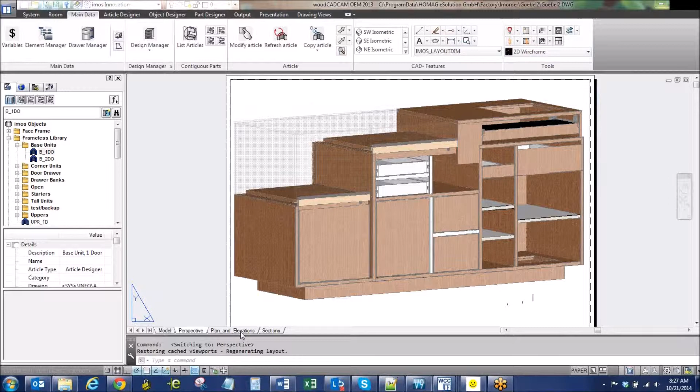And I just set that up, as well as plans and elevations, sections, just very simply drawn from the overall 3D article. So how this was set up, I can look at in the article designer by going to modify article. And it's kind of easier to see if I minimize this stuff here.

Just walk through it from the top. So here's your overall article, and within this first area you have divisions, and the divisions are horizontal in this case, and they're defined vertically in space by this linear division here.

So this first number is the height of the toe kick. If we wanted to make it a bit taller, we could do that, and everything adjusts parametrically as far as the zones with that.

Same with the top here. Just make that a bit taller there, and that's with this one in the middle fills the space that's not defined by these numbers here and the height that I have chosen here.

So just kind of go back to the head. We'll dive into this a little bit deeper.

So once that's divided, I have another zone here on top, and within that zone I have a couple more dividers, one over on the right side for kind of a setback for this top piece, which was 3/8 of an inch, and here I've set it back 3/4 of an inch, and this lower piece will be set back 3/8 of an inch, so there ends up with a 3/8 kind of reveal on the top here.

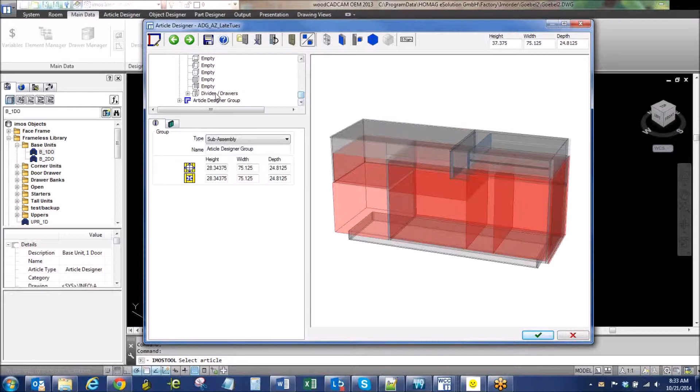So you will come into the middle zone vertically and look at our first division here, which is a virtual division, defined by this. And like I said, this zone over here on the right side is just 3/8 of an inch to kind of get that reveal working like it needs to be.

So I could change this parametrically on the left side, for example. Just bring that over, and now we got a real narrow shelf here, and all the glass and everything is still lining up like you'd expect it to.

Move that back over and look a little bit further. So basically what you're saying is you can take an existing—these guys never do the same thing twice—but you're taking the existing fixture that you built, and by changing a couple of parameters in there, actually readjusted the fixture to a new fixture.

Yeah, that's correct, Roger. And also what I didn't mention is where you have these kind of hard numbers, this could be a variable also, so that when you change this variable, which I have over here, this dollar sign, I'd have to get into the variable table to show you closer about that, but you could have a variable here so that if this was subject to change on a job-by-job basis, you could define that in your variable list and then not even have to come in here and mess with the numbers, which is nice in some cases as well.

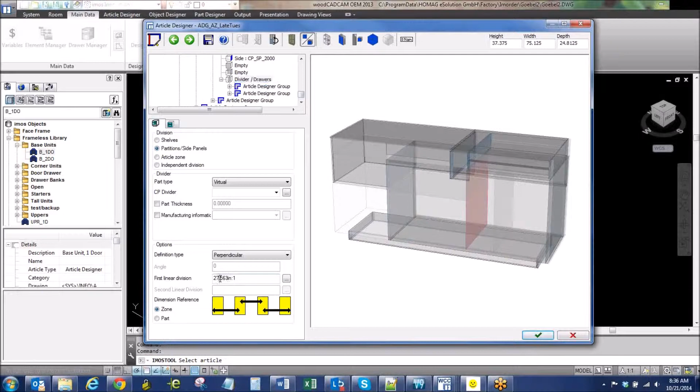And again, parametric here. So within this side, I have a virtual divider, and then this is an article zone. So in the article zone, I have actually an article designed, which is called the AZG_R.

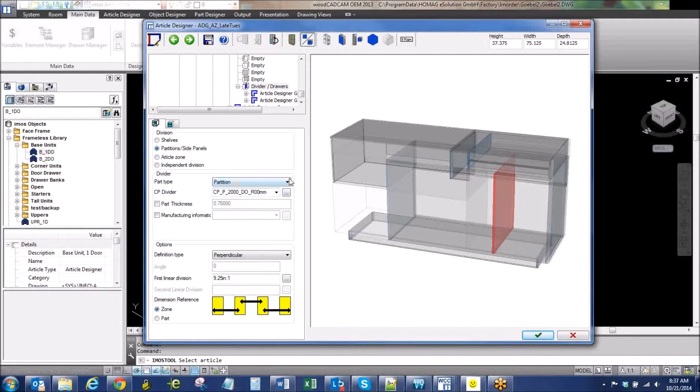Can you please explain the difference between a virtual divider and a real divider? Sure. A virtual divider would just kind of define spaces within an article, and it's a zone separator, so that you could have a divider be a partition, for example, and it is a partition, and I could come and make it an actual partition, and there's an actual partition with the construction principle and machining associated with it. But in this case, it just made more sense to do it as a virtual divider and then have that side actually in the article zone.

Right. So I can come up with any cube, or even with radiuses in the front. In other words, you just started out by saying this is the height, width, and depth of this article, but you could start with radiused articles and stuff like that and build it up from there using the virtual space dividers and so on. Also, correct? Yeah, absolutely. I'm just trying to give them a broader picture beyond this particular fixture.

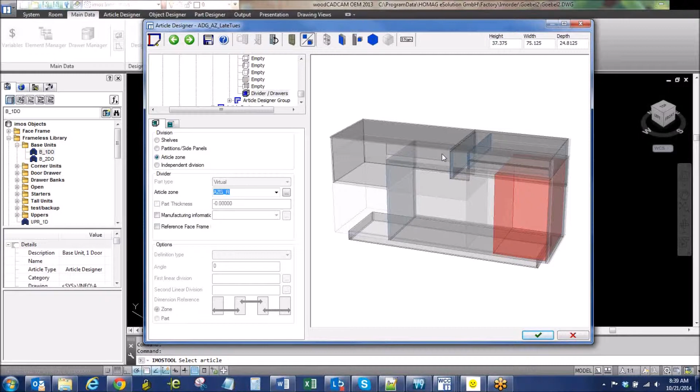Does this article have doors? No, there's no doors on this. Okay, I believe there's just drawers. Okay.

This is a tough question, giving them a real idea of how long it would actually take. But assuming these guys were pros at figuring out how to divide the space up using these virtual dividers and laying that out, they're going to end up doing it every single day, or they'll build parametric units which probably require very little modification. But just from scratch, assuming you had the proper parts, drawers, doors, sliding shelves, hardware and all that, how long do you think an experienced user would take to achieve this fixture?

This is fairly complicated, lots of ins and outs, but less than a day, I would say, is reasonable.

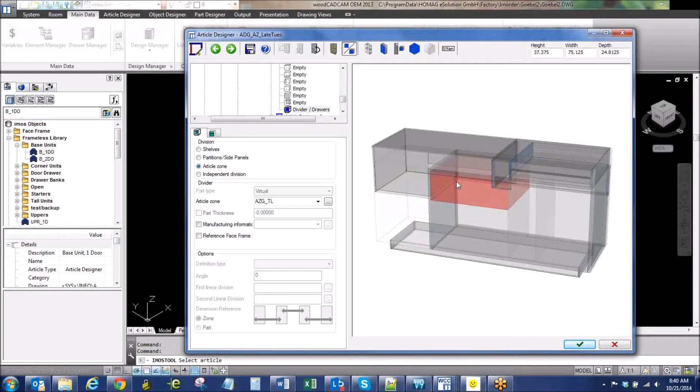One of the more complicated areas, maybe I'd have to go out of the article and just show you one of the more complicated types of areas in here. I have to go and select one of the articles that's within the article zone. Your top shelf looks kind of blocky, but there's actually a lot of intelligence here. Here I'm in the construction principles, where I have options to protrude or inset with numbers or variables, and connection situations. And then of course I can go into look at my part definition, where I have part type, and it's a multi-part in this case, with edge profiles, connections, and machining that could occur on that.

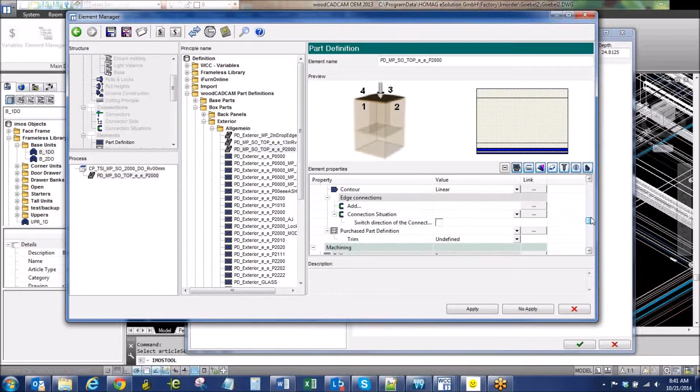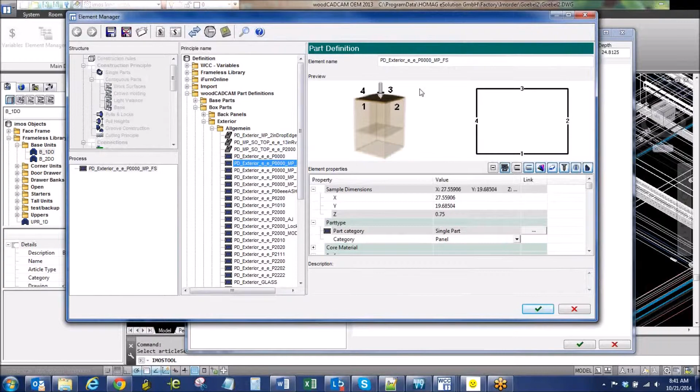But we'll dig a little bit deeper into the multi-part, where it has kind of individual items applied. Here you're looking at your multi-part, which has construction points in here for layout, and then you actually apply your part definition to the construction points. In this case, it's just a drop edge, I believe. Yep.

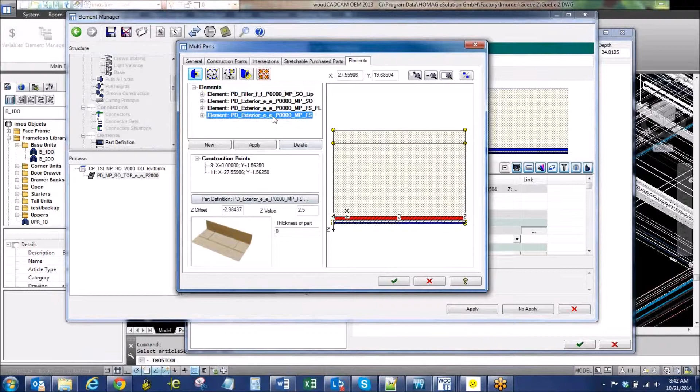So that has its own limitless amount of definitions, just laying out how this all comes together, with the offsets and z-values, and then doing the stretchable purchase part from scratch, which is this profile here, which is a metal extrusion that's in the cabinet. That's all part of this multi-part.

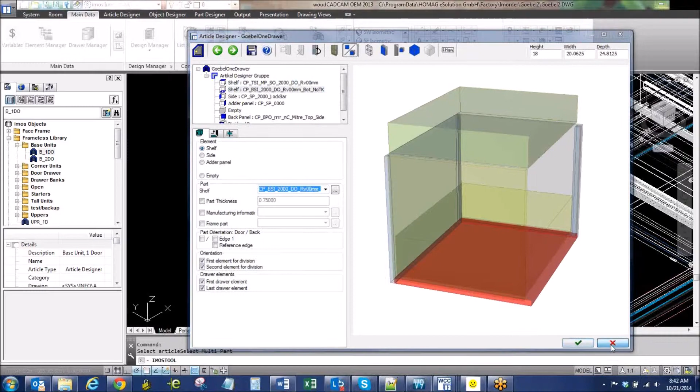And once that's done, then of course you can just apply it right here very easily and move on to the next item. In my case, I had to spend a bit of time working with that to get it adjusted exactly like I wanted it to. So that's what took the bulk of the time in my setup for this. So if they had that already established, it wouldn't be quite as dramatic. But...

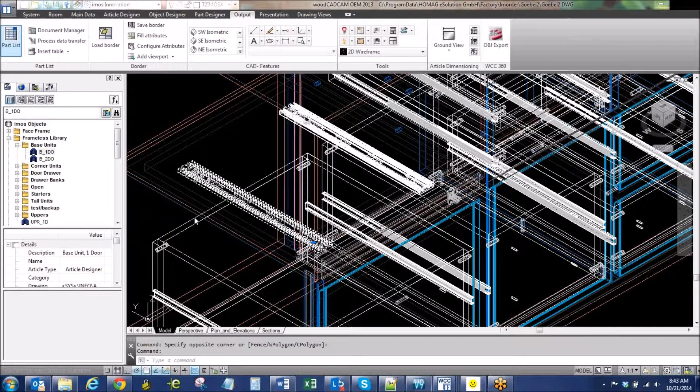Even at this point, let's just say you've spent 6 to 8 hours on this project. At this point you have a cut list, a parts list, a purchase list, and you have G code. Is that correct? I mean, I know you haven't generated it, but you've got the data to push the buttons to send it off to a point-to-point or a router or a saw combination, having done this.

So one of the things we talked about last Friday on site with Goebel Fixtures was a conversation between Tim and Jeff. Basically, currently, the way they do it is they do 2D drawings.

Tim, who works for Brian Murphy's unit or team, passes work down to Jeff. Jeff pulls off the parts and puts them into Ned Brown's CAD code, and Ned does calculations to reduce the part to the cut size. That's what they currently do, so we're looking at a hybrid position where both Jeff's and Tim's efforts yield the same results, with Jeff having oversight on all the input to the factory. I think that's where we're at with this company.

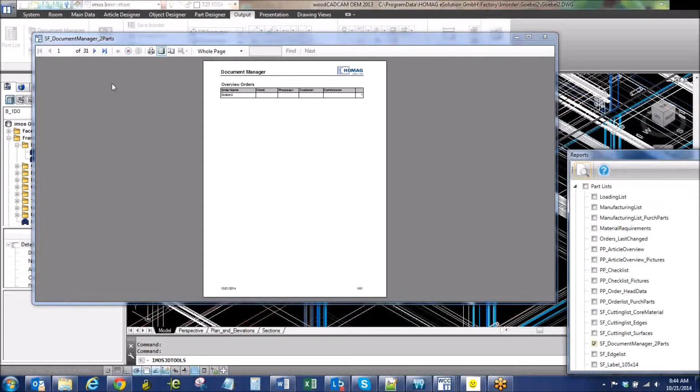You mentioned the reports, and I wanted to touch on that. It's a bit hard to see here, so I'll zoom in and make it bigger.

Your perspective view, elevations, these are all automatically generated as part of this report. There's a problem with my templates where something is coming in out of scale, I'll need to adjust that. But here we see all our parts' dimensions and a callout on the perspective of where it exists in the article, as well as a barcode you could scan to run this part at your machine. So there's a lot of information there, for every single part.

We could go all the way through to the end where we have purchase parts, drawer slides, and even down to shelf clips and dowels. There's a stretchable purchase part, which in this case doesn't have much detail, but you could call that a style mark, whatever you want. So that's some of the information that already exists there.

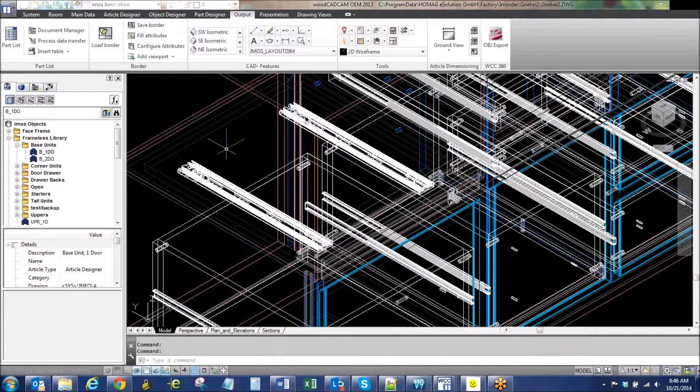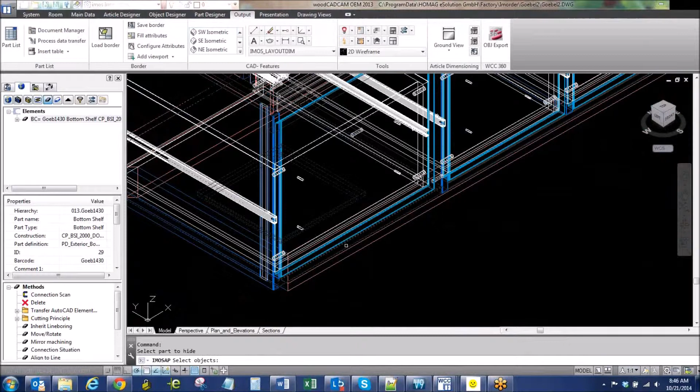If I wanted to look at something with machining, I could just select it and look at it in my list, select it, and here it is in the list. If I want to isolate it, I'll just isolate that element. Here's that shelf.

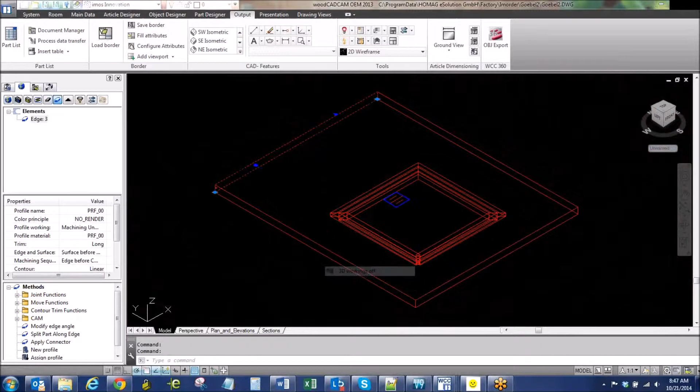Look at 3D workings - this shows a bit more detail on the routing. It's not exactly what you'd expect, but it gives a good idea of what's going on with the machining for this. Let me show all elements again.

Yeah, it definitely lets you drill down to individual parts. Can you show the Visio Manager and show how you can go from minor details to major details?

Sure. I usually work in full render mode most of the time since I have a fairly speedy computer, and I don't mind seeing extra edges, but you can bring it down to just engineering details in this case, and then define what you want to see in the engineering details, which in this case is mostly the same as the render.

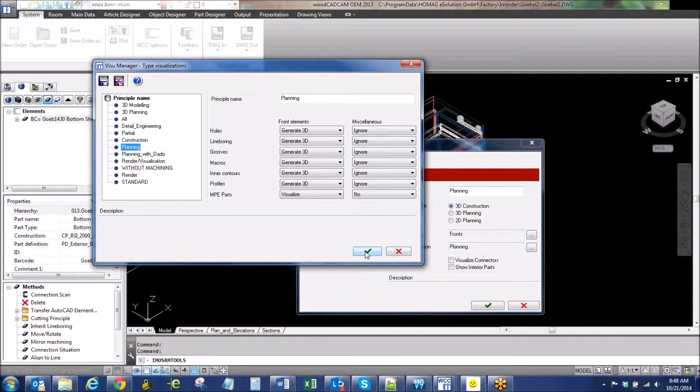But if I come down into planning, look at that. This is kind of what I was thinking Tim might be using for space planning. They do space planning before they dial into the actual fixtures, so he could get at this level for speed, and then dial it up for the one-off generation.

It seems to be running a little bit slower, just due to this meeting. Yeah, those GoToMeetings always do that.

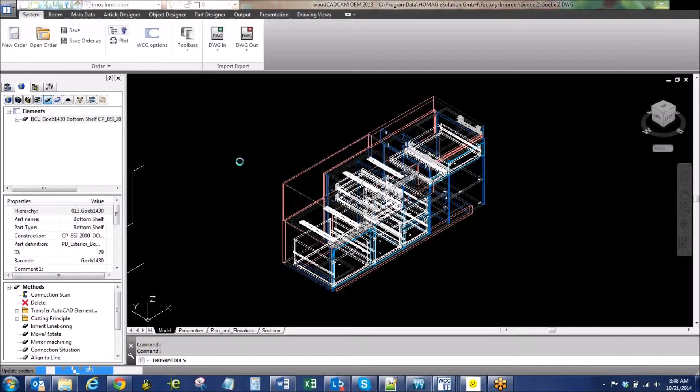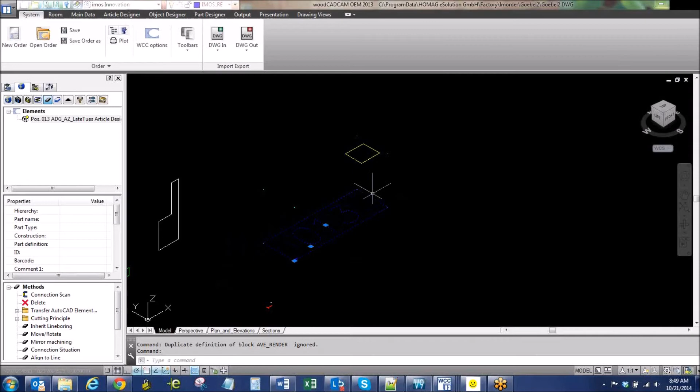So here is just the overall outline of this article with some details about it - height, width, depth. This is actually 'late Tuesday,' so I named it that. Of course you can name it anything you want, but this is the most basic visual level, where you could, for example, have cabinets all just laid out - a 24-inch wide drawer cabinet next to a 36-inch wide sink cabinet - and just lay out your squares that way, then hand it off to the engineering guy.

You would pump up the details to look at much more of what's coming in, and can make adjustments or customize on a case-by-case basis.